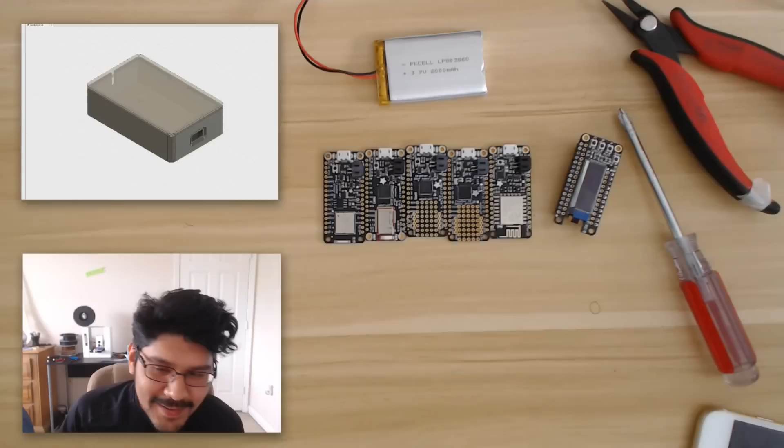Today we're continuing the project from yesterday, a multi-purpose enclosure for the Feather line of boards. I'll link yesterday's stream below where we started this enclosure, inspired by Bill Binko of ATMakers. The main goal is to make an enclosure that works with all the Feather boards, a battery, and a couple of components.

The idea is to have different tops for different situations - one for the OLED FeatherWing so you can see the screen through the top, or tops with mounting holes for components like a buzzer. We had an open discussion yesterday going back and forth on batteries, and ended up going with this battery as opposed to this one.

In today's tutorial I want to walk through the updates I made off camera. I'll likely design this component, the FeatherWing OLED, in Fusion so we can create a proper topper for it with the right clearance and openings for the screen and maybe the buttons.

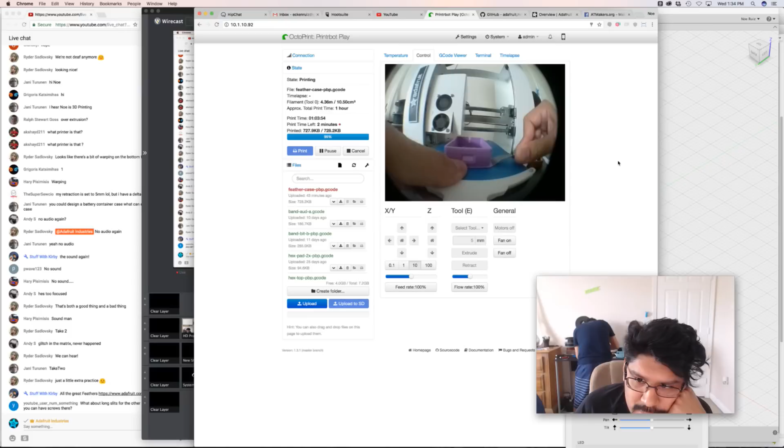This is print number two, just trying to dial in the settings. I got quite a bit of blobs and zits - oh no, you've completely destroyed the bed. That happens, well I guess so. There was some warping - no, I think it's flat.

One way to alleviate warping is to have a big brim, which is what I did here - about 6 perimeters wide. Let me get the focus better. That's a lot more flat. As you can see, the first prototype did warp a little, and there's still some zits and stuff.

We can take a look at the slicer settings, but I'm not sure why that's happening. I checked Simplify 3D's troubleshooting guide, and sources point to maybe needing a restart distance on retraction, or perhaps wipe coasting turned on. We'll work through that, but it's a little excessive here.

Not sure why, but I got the tolerances correct for the nylon screws so they fit in here. Since they're nylon they can't really create threads, so I had to open the holes up a little more. Also, because of the shape of the screw head, they protrude out a bit, which I think is okay.

I tend to use machine screws made of zinc or metal that have a tapered, chamfered bottom edge. These are just flat, so they protrude out a bit, which I don't think is too bad of an issue.

Maybe they can be used as little feet or something. Not too bad, but it fits well. The goal was to have access to the USB port, so you always want a bit of

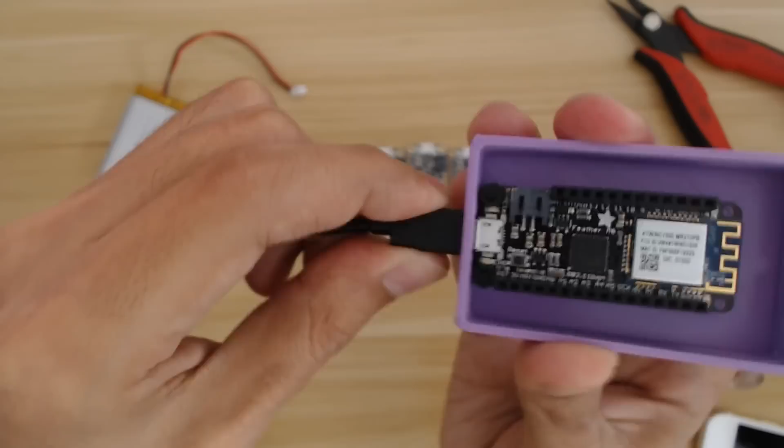clearance for the USB. Where's the USB cable? Where did it go? Oh, that's down there by your feet. If you'll notice, there's a bit of an indentation on the port opening, so it's not just a hole, it's actually a slight offset, so that when you plug it in, the connector has a bit of open area so it can get plugged all the way in.

The enclosure is 3 perimeters thick, so it's got good strength to it. If it was just 2 perimeters thick, it probably wouldn't be as strong. So with that, I can do this kind of indentation here for the USB connector. That seems to work out really well.

I noticed that although it looks like there's a lot of gap here, like clearance, I find it pretty difficult to actually plug this in. So this is the battery, and this is the JST - the male connector, and this is the female connector. There's enough room to get it in there, but you kind of have to finesse it.

I would probably recommend plugging in the battery first and then securing it to the enclosure, because I kind of can't.

Maybe I can work it in there. I know there's enough room, you can kind of see that. I just have to do this little maneuver where it's right angled and then kind of futz with it, but I don't feel like futzing with it right now. Oh wait, there we go.

So there you go. Most likely what we'll have to do is put a hole somewhere here so that this can actually get threaded through the bottom, because we're going to have that external component here. So that's what we'll end up doing. But hey, there's enough room in there. And I ended up making it centered so there's equal distance between here and here, and then this is just extra distance so it can encapsulate the battery.

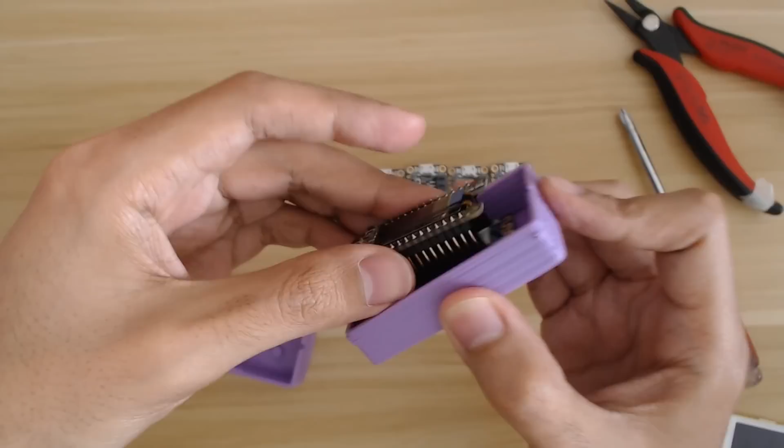We would end up... the goal here is to have one enclosure for all of them. One thing I noted is that it is secured, but if you have something like this plugged in, you have to kind of hold this down, because you get this sort of action here. And actually, when I pulled it off before the show started, I bent these little pins, so I had to flatten them out using a flat pair of pliers, which is okay, but be careful.

So testing that out is always important to make sure you can get things in and out. But that's how it would go. I'll probably have... is it backwards? No, it's the right way. So hopefully that works out okay. It is a little bit thick, yeah, but I think it's okay.

All right, let's take a look at the CAD stuff now. So in Fusion 360, here's kind of what I have set up. I did come up with these - so here's the topper, right? Here's kind of like the generic top. There's a generic top right there, and I made it see-through so you guys can see.

It does have these little nubs, so if I hide the case, you can see these little nubs here. I haven't printed this out yet, so I'm going to get that started soon. But the idea here is that these nubs, or these indentations, will allow the nubs from the enclosure to kind of clamp together.

I also added some chamfers on the sides here on both of the parts so that your fingers can actually get into it. You can see here on these edges there's chamfers, so you have more of an area to open it. I think what's cool is that you can kind of get your finger in here and just lift up to pop this out.

Since I probably don't need these little nubs on all 4 sides, I think that'll work okay. But I might need to get rid of this one, because... make sure that you're on the CAD screen.

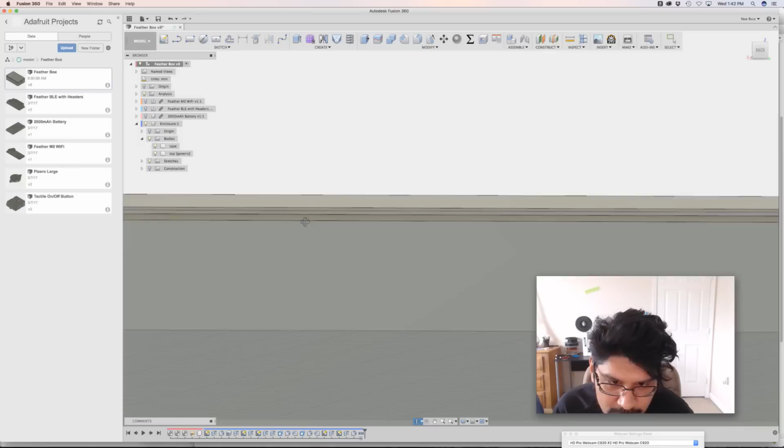And there is that chamfer along the edge of the 2 objects so that your finger can get in there. And if you look on the back here, there's an opening in the slit so that you can get your finger in there and pop the thing off. So no need for a nub there.

And I think I'm going to get rid of the nub on this side, because if you look at the feather component with headers, it's kind of intersecting with that indentation part. So if I open that up, you can kind of see, yeah. So I'm going to probably get rid of this nub here and just leave the side ones. That should be enough to hold it in place, hopefully.

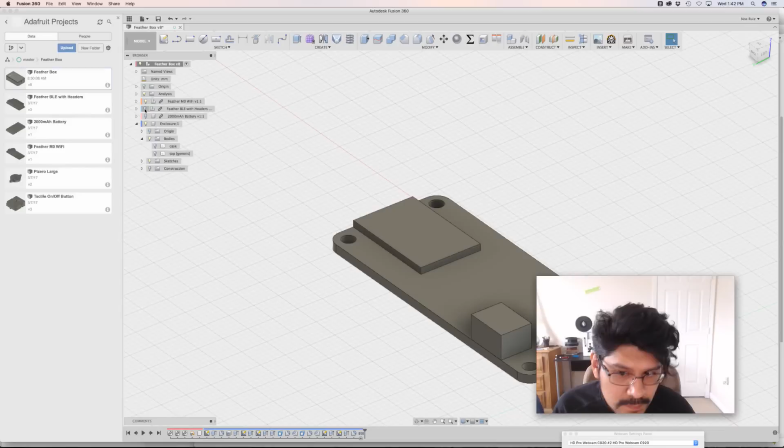I did bring in the feather with headers. Before, when I was designing, I was just designing around the WiFi feather, which doesn't have those headers. So I kind of reworked this one to have those headers.

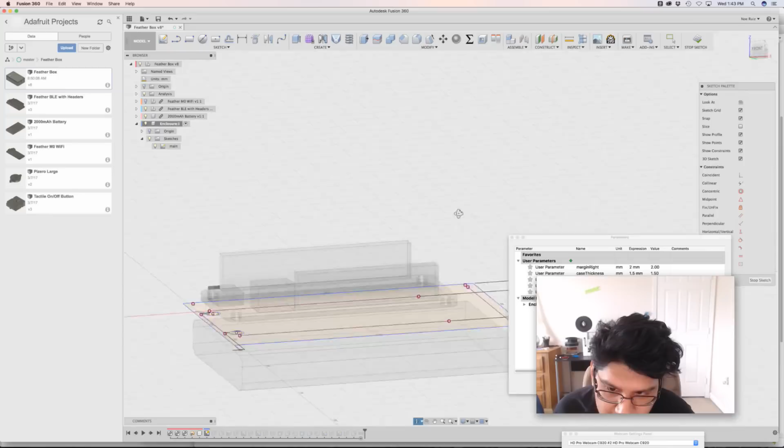Let's take a look at the sketch real quick in the main. I tried to have it centered, because it wasn't really centered, at least on the y-axis. So I got that, and I added a couple of user parameters here, the margin for the right and the sides. This is the right over here, and it's basically being driven through the battery. There are some projected edges here from the battery, so that if I ever need to adjust that, it'll adapt with it.

So if we take a look at the enclosure as a whole, let me get out of the sketch. If we take a look at the enclosure as a whole, we can still modify the width so that these nubs here will actually adapt with it. So if I change the side margins from 8 to 12, you can see the enclosure updated, and those nubs kind of moved along with it. So if we ever have a bigger battery or something, I can quickly push out an update.

So this was what, 8? Let me put that back to 8, and that seems to work okay. So that'll hopefully work okay.

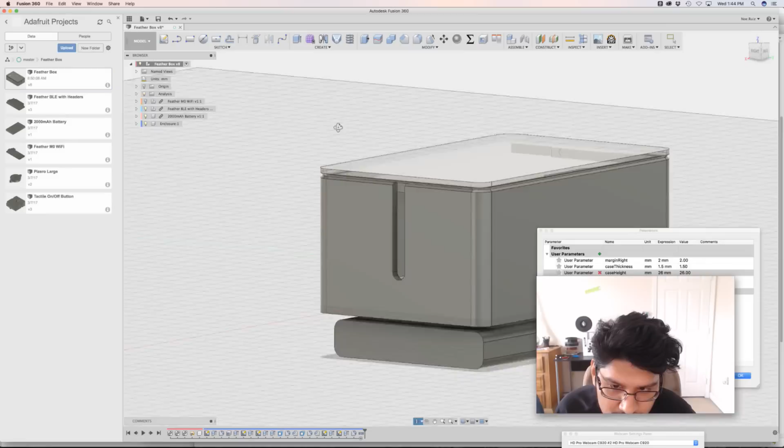The height is still adjustable. So if I update the height from 16 to 26, for example, that's a little excessive, but everything kind of updates with it. Again, those nubs get updated, and the topper gets updated with it as well, and so does the slit, which is driven with a collinear constraint, so that it is okay. So what was this, 16 or so?

Yeah, so it's very important to apply these user parameters before designing, so that you know what features need to adapt with it. So hopefully that works out okay.

But that's kind of it for the enclosure. I really want to get this topper sorted out. So in order to do that, well, this topper will probably work. Let's get this into Fusion 360 real quick, and I'll have it printing in the background. So I'll save it out.

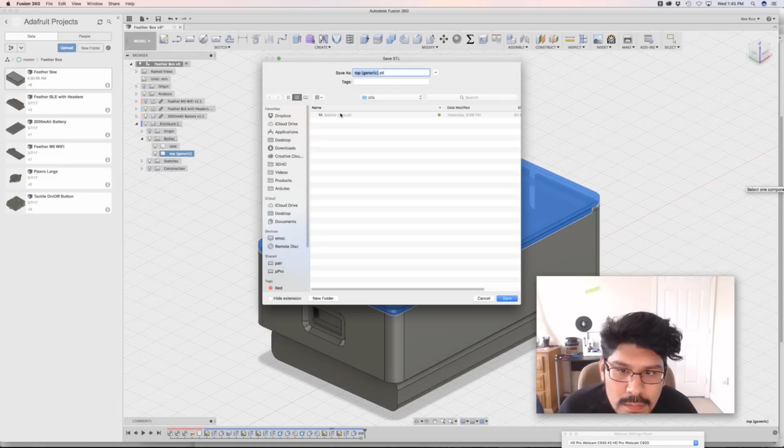And then bring it into Simplify 3D. I'll probably have to flip it so that this side is on the bed. That's Control L too, you can use Control L, yep, like that.

And then we'll do a quick look at the settings. Nothing too fancy here. I'm using the 0.4 nozzle with a 100% multiplier, or 1.0 multiplier if you're using Simplify 3D. The extrusion width is set to auto, which normally comes out to 0.48, and the retraction distance is set to 1 millimeter.

If you're using a Delta bot, it'd probably be something bigger, but I'm using the Printrbot in the background, so it's like 4 to 6, something like that. The retraction speed is set down lower to 20 millimeters a second.

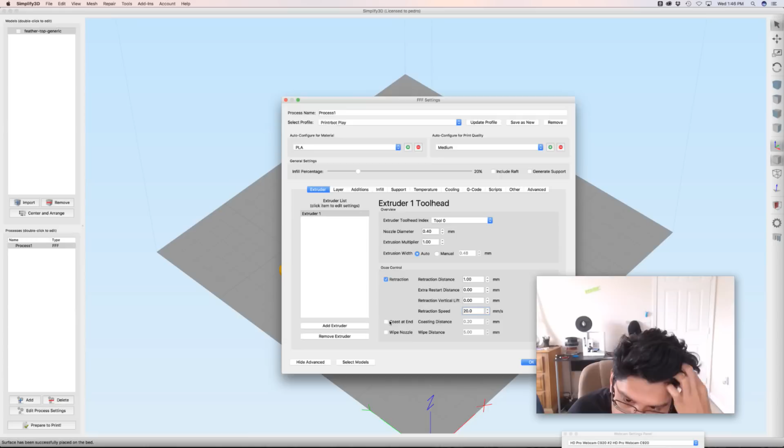Those blobs and zits that you see usually come when the extruder is looping around the perimeter, and to relieve some of the pressure from the nozzle you can enable this setting, but I don't think I need it right now. Still, that might be one thing to consider.

Nothing too crazy here, just using a 0.2 layer height and 2 shells for the outer perimeter at 100%. First layer height is 100, same with the width, and the speed is half that. Speaking of speed, I'm printing kind of slow, 50 millimeters a second on the default printing speed, and 70 millimeters a second on the movement speed. The outline is set to 50, and solid infill is set to 100.

There really isn't much infill since all of these parts are just perimeters. Thin wall behavior is set to use thin perimeters because I don't want any excessive infill gap — I really don't have much there.

As far as the ooze control behavior, it's kind of the same stuff — only wipe the extruder for the outermost perimeters. Maybe I need to turn that off, I'm not sure. And only retract when crossing open spaces, forcing retraction between layers. So if anybody knows if one of these checkboxes will alleviate those zits, let me know.

Pedro's in the chat room, he'll see it if you say anything. But other than that, I think it's okay to print this way with these settings.

So let's take a look at it. Having that big brim with 6 perimeters will keep it down. Let me grab you some more tape — yeah, I forgot, before I can print this I need more tape.

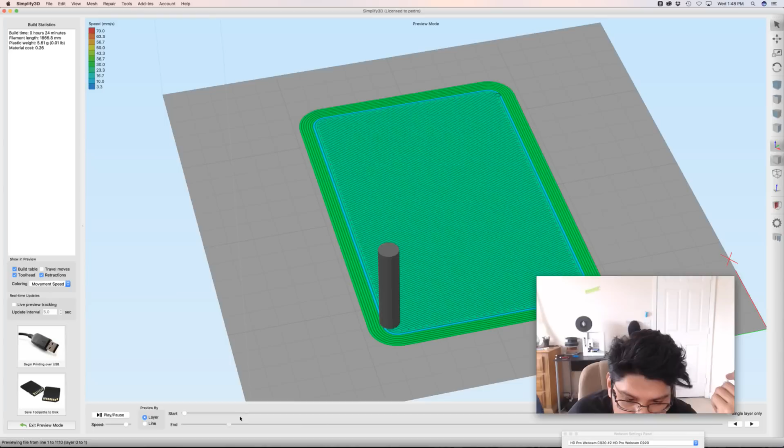It's pretty solid as far as the top and bottom layers, I think I set it to 6, so there's a few of them. There's a tiny bit of chamfer there, so it doesn't really translate too well. The less layer height you have, the more detail you will have, but I don't think I need that much detail, so hopefully it comes out okay.

So we can watch Pedro fix that.

While Pedro's fixing that, I am going to get started on modeling the featherwing component. So there's some — what's that? Some suggestions that have the JST extension, or the battery connect with the JST extension. So maybe making like a panel mount.

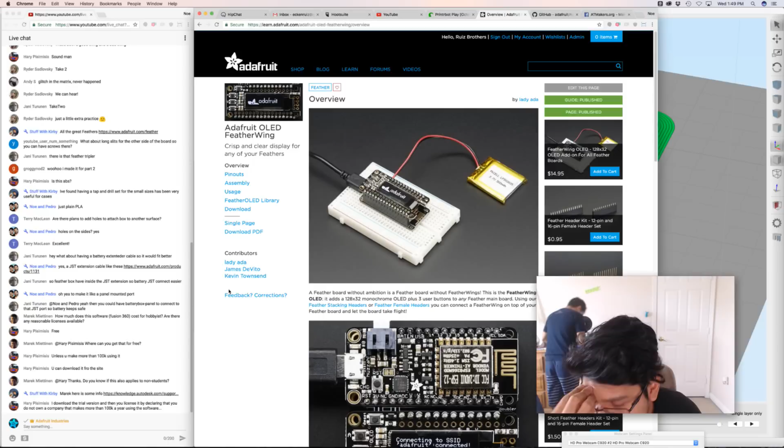Yeah, I don't think it's that much of an issue. I mean, you saw me put it together — it's just the angle my hand was at in order to get it in shot was a little bit hard. I think that was my issue, but there's enough clearance for the thing to connect to. I can see where a JST extender would give you more freedom to plug it in, but I think it's okay. It is an option though.

The featherwing has its own guide like any Adafruit component, and in order to model this, I'm going to raise the bed.

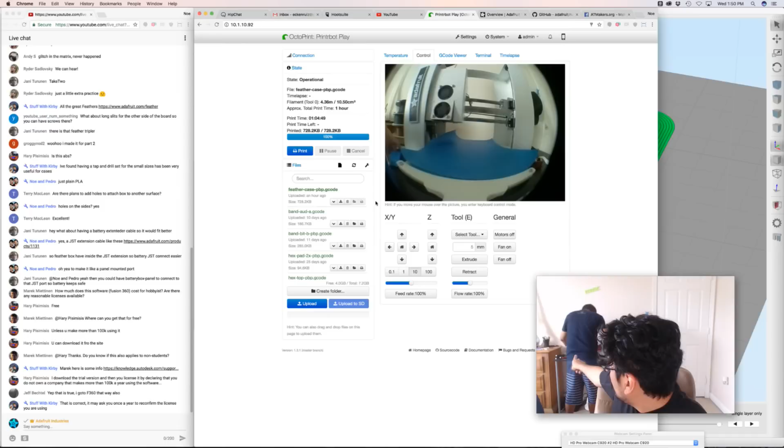Is that good? Should be good. I have the squeegee over there if you need it. There you go. Cool.

So what I did was I went ahead and downloaded the EagleCAD file. You can grab most of the EagleCAD files for all of our components from the guide. If you go to the download section, there's a download for the PCB in EagleCAD. So what I'll do is grab the tech drawings or dimensions for the featherwing.

It looks like they are kind of laid out here. Some of the things, like the buttons, aren't laid out, but at least I have the mounting holes and things like that. So if you click on a picture, you can get a bigger size of it. You can see here.

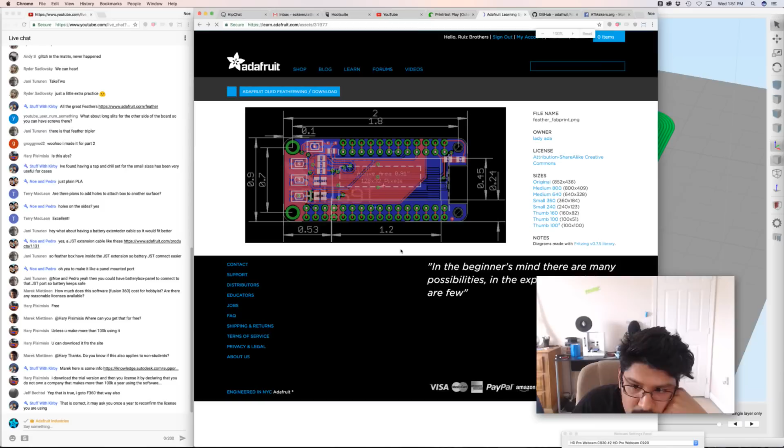But I'm just going to use the dimension tools inside of EagleCAD to get a better idea of the size of the buttons and things, and where they are relative to the board. So let's get printing that topper, just to make sure that our tolerances and stuff work out.

There we go. I'm using Octoprint. Is everything okay there? Yep. Takes a second to upload.

Give me a chance to kind of look at the chat room. Jani's saying that the JST extension, yeah.

Yeah, I talked about it. It would make it easier to connect to the battery. Yep, that is definitely an option. It wouldn't need to do that. You don't need to modify the CAD, right? As long as there's a hole on the bottom of the enclosure, you can do whatever you want with it.

Looks like folks are asking if you can use Fusion 360 for free. Yeah, there's always some confusion with Fusion 360 - is it free? What's this 1-year license deal? The 1-year license is for hobby makers that make less than $100,000 a year, and you can renew it after the license expires. So once my license expires, I will just renew it.

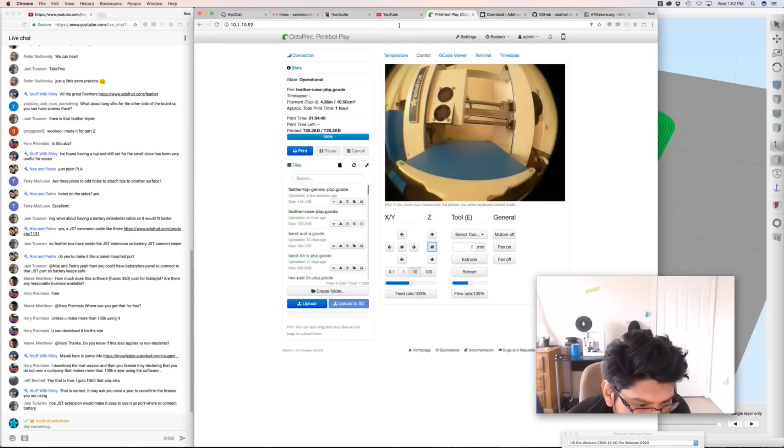All right, stuff is uploaded. I'm going to go ahead and kick off the print. The Marlin firmware on the Printrbot tends to give an 8-second lead once the extruder is nice and primed, and then it'll kick off the start G-code, which kind of does a purge.

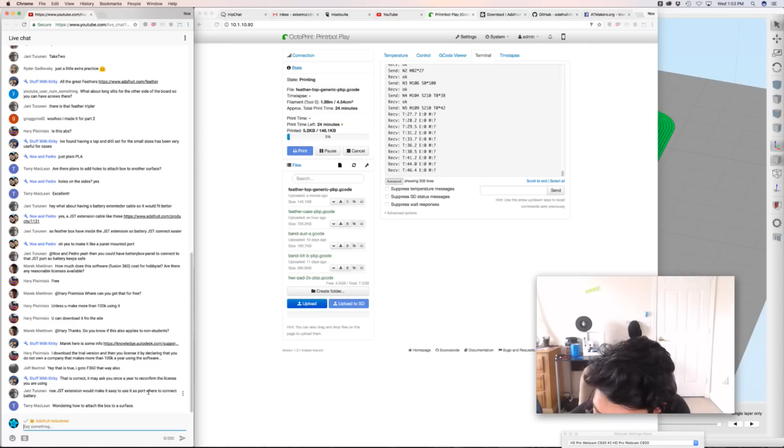Okay, Terry is asking how to attach the box to a surface, like the cover to the lid of the enclosure. There's these little nubs - I'm not sure if that's your question, but there's these little nubs that will connect to it, so they kind of snap into place. And the reason why they're triangles is so that they get fitted in.

So if you look at these little triangles on the edge of the case, on the very top of the case - they're these little triangular nubs, and then those will get pressed into this lip here that has an indentation for those nubs, and there's a little bit of an extrusion on the inside of the case lip.

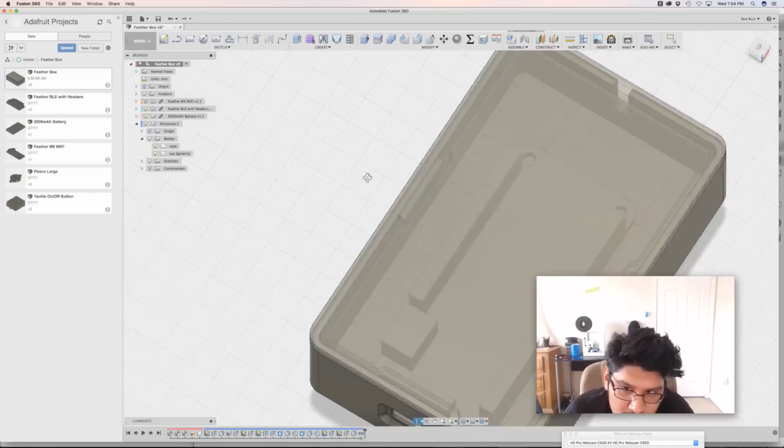So this lip basically acts as a little friction fit thing, so you can see it with the transparency here, how it kind of works. And there's a little bit of clearance along the edge of the lip, so that it allows enough clearance for it to actually snap into place.

But I'll probably end up getting rid of this one here, this front nub, because I think just having 2 on the sides is okay, or 1 on each side is okay. So that's how that's going to work.

Okay. Yeah, it's at 180 right now. It takes a little time - it's not like a Type A machine. It'll heat up in like 10 seconds.

So while that's heating up, once it kicks off, Pedro, can you kind of clean the purge for me? Mm-hmm. Cool, thanks. So I got Eagle open already.

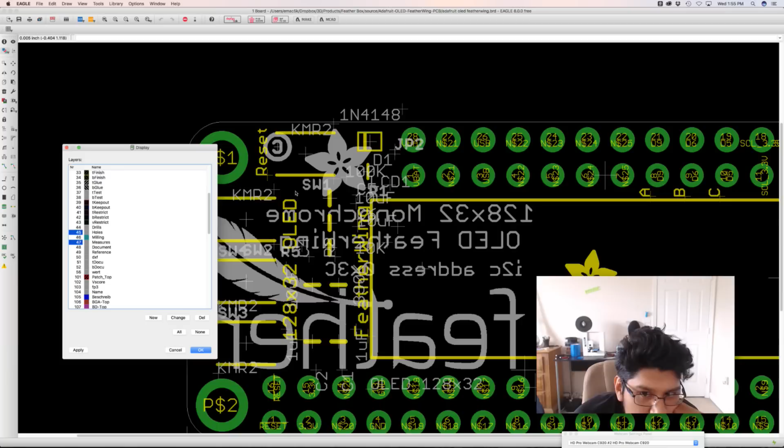So what I'm going to do is just kind of get some dimensions cleaned up in here. So let's see, I probably don't need the vias. And I think there's already a dimension layer. So which layer is this? What's V-score? Well, that's interesting. Holes is there, I think it's under measures. Nope, document. Dimensions is on, but I don't see them.

Mitchell is asking how we can weatherproof the box. Epoxy maybe, like XTC 3D? Yeah, but I would just probably make little Ninja Flex kind of plugs so that you can close all of the holes.

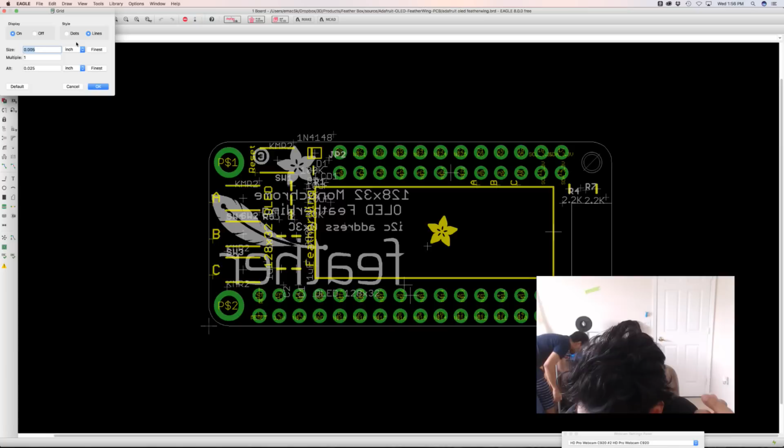If your enclosure doesn't have any holes, then I guess you're safe, as long as you have a nice weather-tight thing. But I haven't really made anything weather-tight. I think one way to do it is to make these rubber Ninja Flex covers that would fit into the little port openings.

Let me take a quick look. How's the first layer doing? Good, okay cool. Alright, that should take 24 minutes or so.

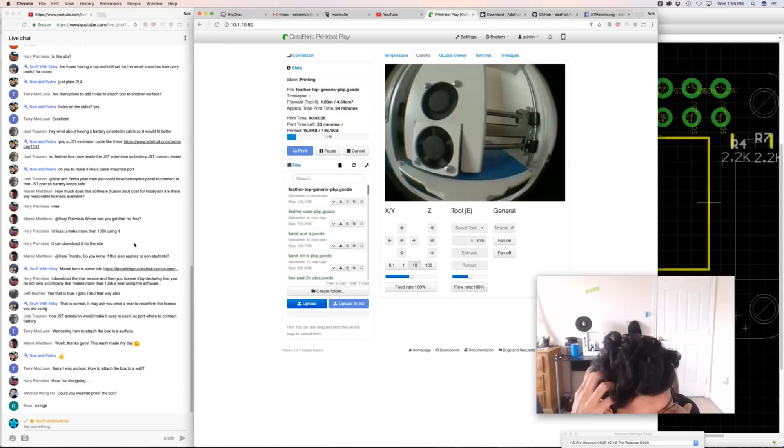Hopefully less. Russ is saying O-rings, I'm guessing, for the parts where the lid snaps onto the case, so that it gives a watertight seal to all the openings. Yeah, that's a good idea.

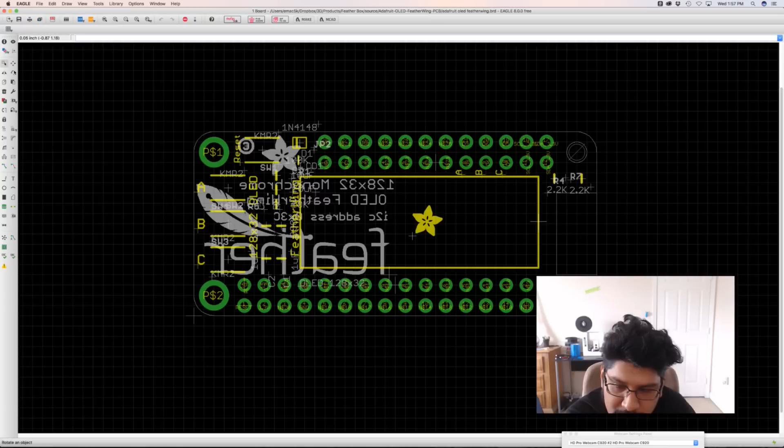Another thing you can do is maybe spray Never Wet onto the boards themselves. This is a weatherproof coating for electronics called Never Wet. I think Becky was testing it out, showing an Arduino working underwater, and as long as you don't have the battery in the water, I think you're okay. I don't know too much about the coating myself, I haven't used it, but look back if you're interested, search for Never Wet in Google, and maybe our video, Becky's video, will show up.

You might be able to heat shrink the entire circuit as well, just stick it in, because she did that too. Just put the whole bare board inside and heat shrink it. But of course you might not have access to it after that, you'll have to cut it open. Let's just get a tauntaun, cut them open, throw the board in there, and you're good to go.

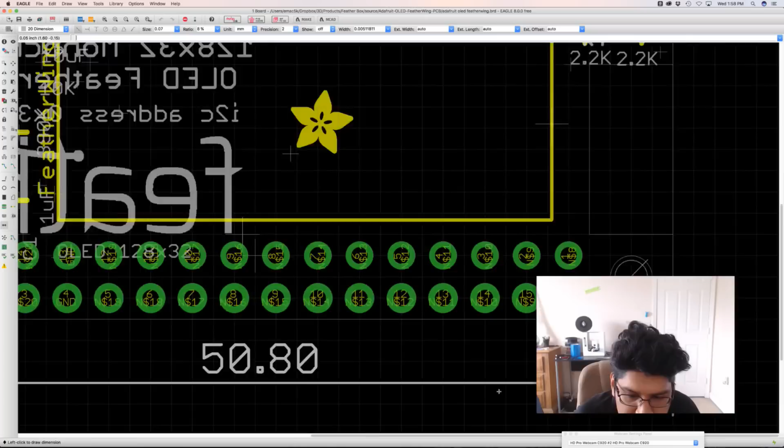There's a dimension tool inside of EagleCAD, and I'm going to use that to get these dimensions. I need to make sure to do it on layer 20. The board should be about 50.8 millimeters on the X, and on the Y I believe it's... I forget what it is, and that's why I'm doing it this way.

22.86. Okay, the footprint for the buttons looks like it's not there, but that's just Eagle—maybe I hid the layer. I want to get rid of this silk screen layer, I think it's that one. I'm gonna get rid of all that.

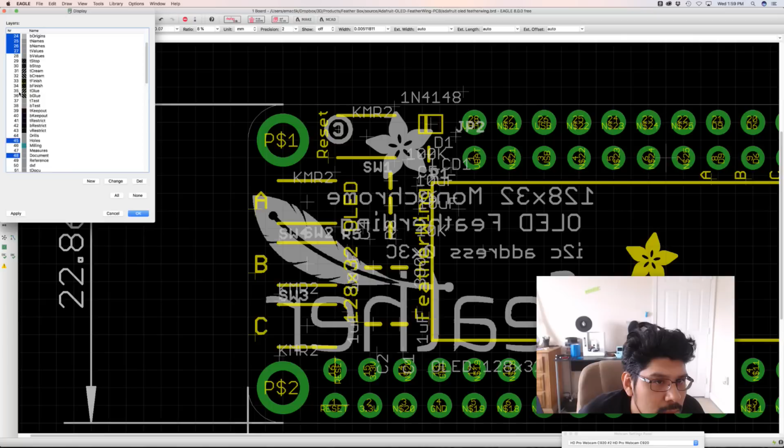Maybe it's T place. T place, yeah that's the one. I kind of need those. So I'm guessing these guys are the buttons, right? Yeah, these are definitely the buttons. There's 3 buttons, A, B, and C, and then there's a reset button.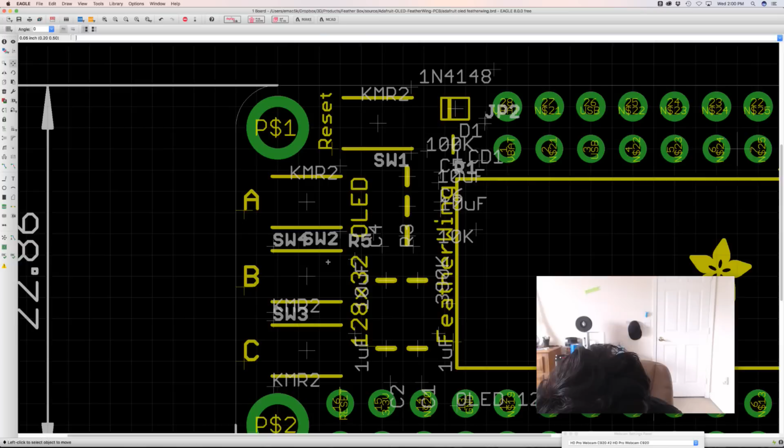So I plan to model definitely the PCB board, obviously, and then the OLED display itself, which is in a very special spot, and then the 4 buttons.

Let's see, I think the mounting holes are... what's the distance between them? 17.78 for those.

And then the screen looks like it's in an odd place. No, that's just a little Adafruit logo. Okay, where's the... there's the screen, right? That's gonna be tricky.

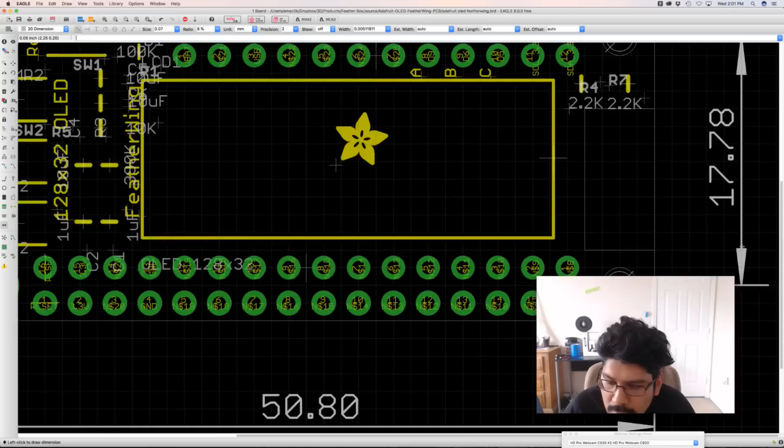And then these guys in the back, where is it? Looks like it's the same. Yep, so the mounting holes from the left and right look like they're about the same. That's good.

There's this kind of cutout, which is kind of interesting. So there's the cutout, and then I'm not sure how wide it is. So that's how wide it is, 5.08. So I think that's enough to figure this out.

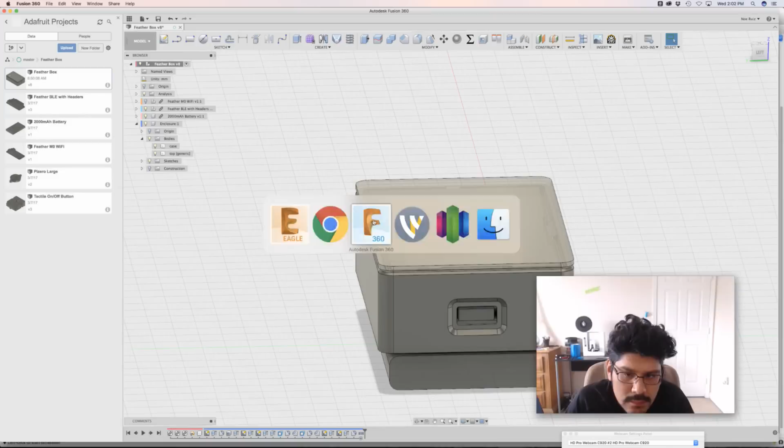So in Fusion, I'll get a new component here, a Feather OLED wing. And one thing I didn't know is that the document—yeah, it's there, okay—so this is like the origin of the document, so it's sort of 0, 0 from an X and Y standpoint, and everything kind of gets pushed out that way.

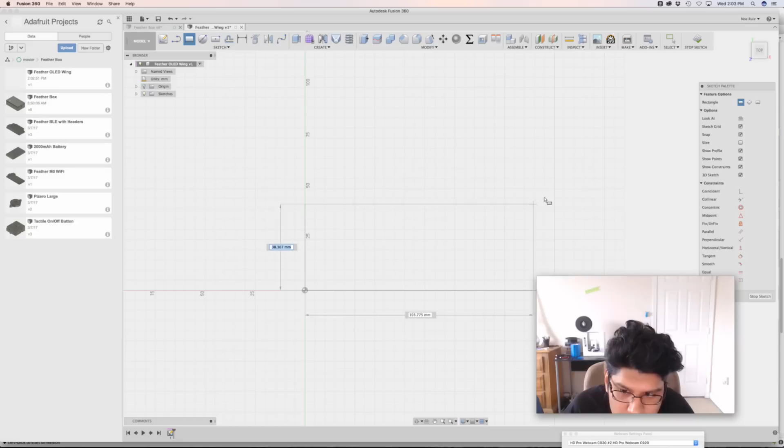So I'll kind of make it the same. Oops, wrong, don't want to use the center rectangle. 22.86 by 50.80. Yep. 22.86, that's correct. So there's our main board.

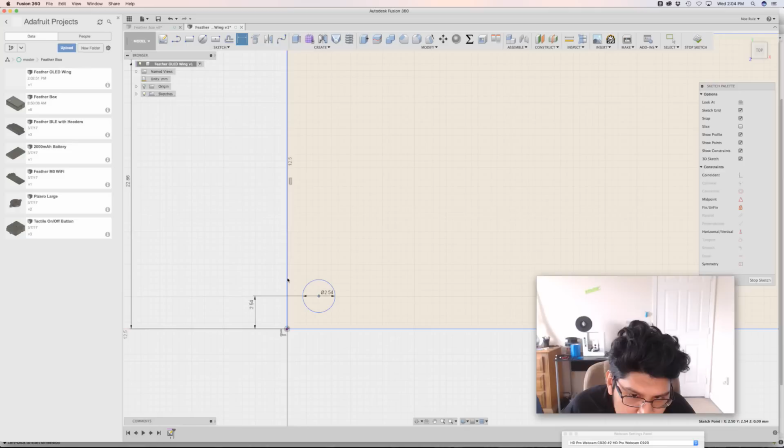The mounting holes are, I believe, 2.54, and they're using the same distance from the edge of the board. Then I'll do a little mirror action here, so I can mirror this guy on that line, and then maybe run it again.

Well, I need a center thing. Oops, use the line tool. I'm using the line tool for making these construction lines, and then using the X key to do that normal construction thing. So I'll do another mirror here, mirror these two guys on that vertical line, like that.

Hopefully that is correct. I think if I do a quick measurement, it should be 2.54. Yep, should be fine. So that's the main PCB. The thickness of the board is 1.6 millimeters, and then there's a little fillet on the edges here.

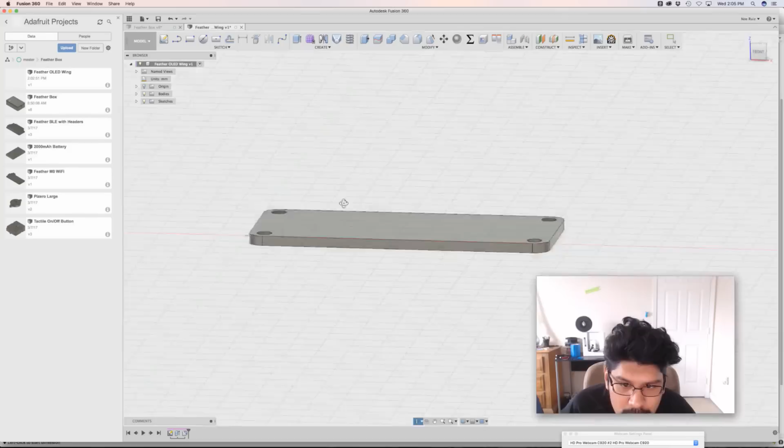Of 2.54 also, so there's our PCB. Actually, I forgot to do the cut, so let's go back and do that cut for the ribbon cable, the flex cable for the actual OLED. So it's somewhere over here. Let's do collinear, so it's on the edge of the board. It was 5.08, and then it is 10.16 wide.

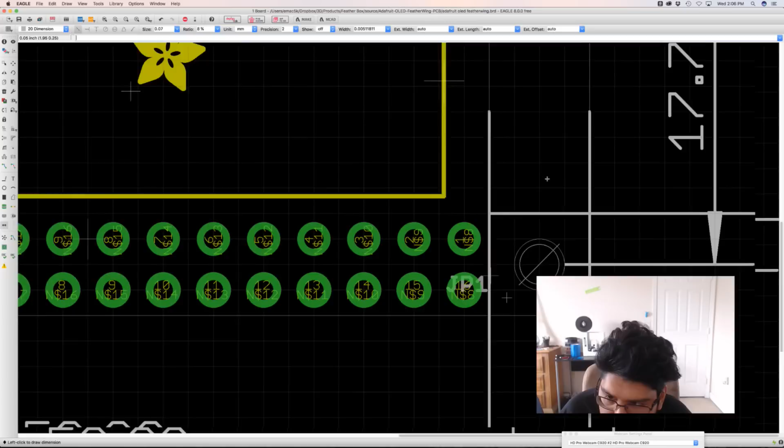Okay, so I got those in there. Now I need to figure out the distance from this guy. Dude, it's kind of tough. 5.08. Just off by 0.8. It looks kind of odd, doesn't it?

Oh, that's the way it is. See, the cutout isn't actually centered because there's some resistors here, that's why. So it's not really centered. So let's okay that and jump into that extrusion and just get rid of that. It is pretty sharp, there aren't any fillets on that edge, so there we go. That's what we got so far.

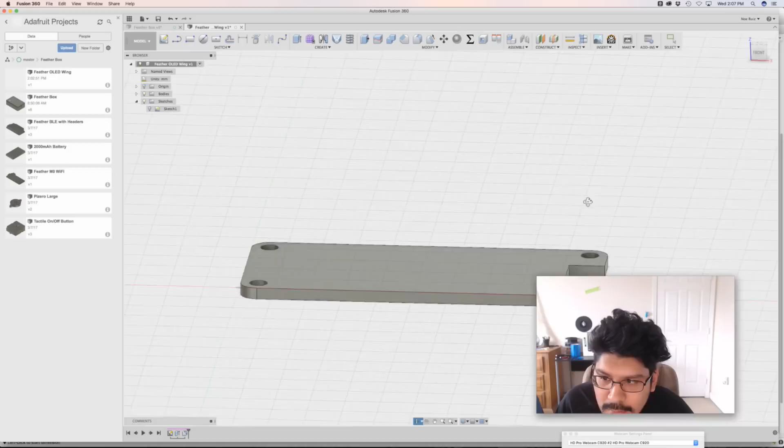How's the chat doing? Good. Just chatting with them. Let's see.

Harry's saying maybe I need to start printing at lower speeds as well. Yeah, I think the default speed for the Printrbot Cura profile is like 50. Yeah, I tried printing it at 60 millimeters a second, or 70, and it came out really bad. Like, this thing came out awful. I just want to show you how awful it came out. Look at that, it came out so bad. I don't know why, I guess because it was too fast, so I slowed it down. Look at that, like what is the deal there, man? That's crazy.

Yeah, so on almost all the printers we're usually at 50 to 60 millimeters a second, but on the Type A machines and the Flash Forge, we can go up to 90 millimeters a second. Yeah, it really depends on your printer. Cool.

And I think the TAZ default is 120 millimeters a second. If I remember... the default speed? I think so, or is it 100 millimeters a second? I don't know, Kirby could tell us. I vaguely remember it was at 100 millimeters a second for their default speed.

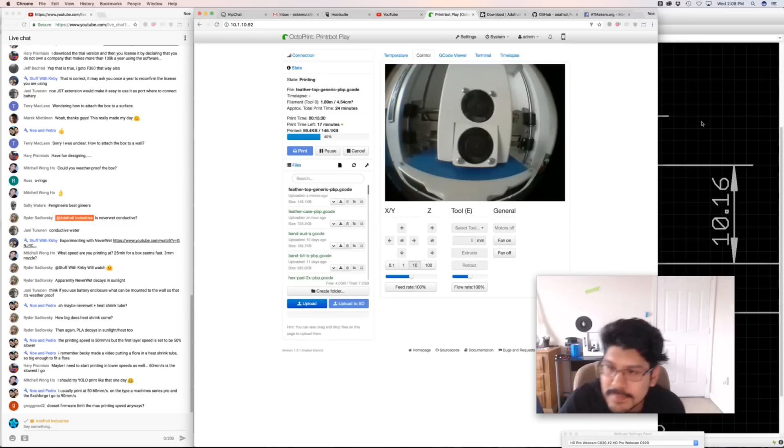Oh, that's a good point. Grog in the chat room is saying he thinks the firmware limits the max printing speed anyways, so even if you tell your slicer, the firmware will be like nope. Also, things that slow it down are whatever speeds you have set in Simplify 3D for outer shells. Yeah, your outer speed is always like 50 or 80% of whatever the default is. Harry's saying he uses 80 on his MK2. I'm assuming that's the Prusa. Yeah, Prusa MK2. Okay.

Alright, so how big is this LCD screen? Let's get that kicked off here. So this is the... I'm going to project that there.

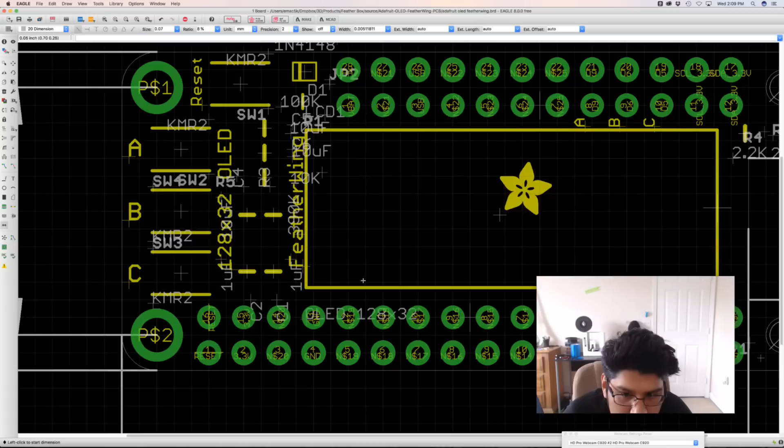It's a little tricky. Yeah, I need a finer pitch grid. So that's a really fine pitch there. I'll start from there.

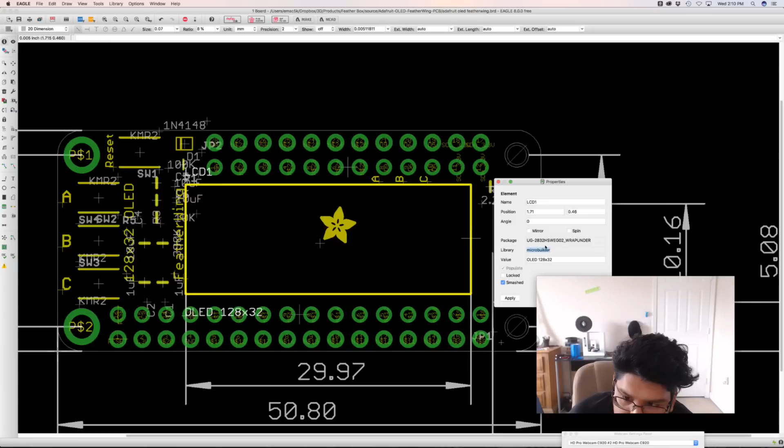I could try using the info inspect tool to see what the actual thing is, but it doesn't really give you a thing. See, it tells you the position relative to the origin, but that's not going to help me here. And the package is a set of the microbuilder library, which I don't have access to, so I can't go inside and edit the main library component from Eagle. It's just kind of baked in there. So this is kind of a hacky way to do it, is to figure out, just use your dimension tool. So it's 29.97.

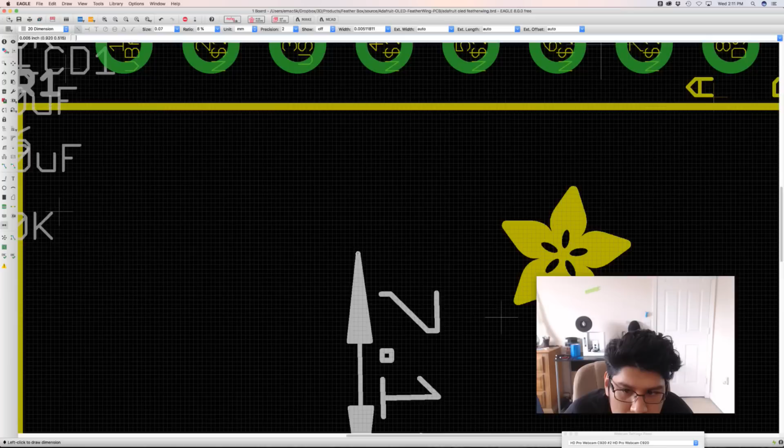And then we'll see what the width is. So it looks like 11.3. And then we'll see how far it is from the edge of the bottom. Looks like it's at a curve there. It's at an angle, it's kind of weird.

There you go, it's better. 5.97. Well, that is tiny. Oh no, no, no, sorry, that was the wrong thing. Yep, okay, and then we'll find out from this edge. Hopefully that's not too much of a hassle.

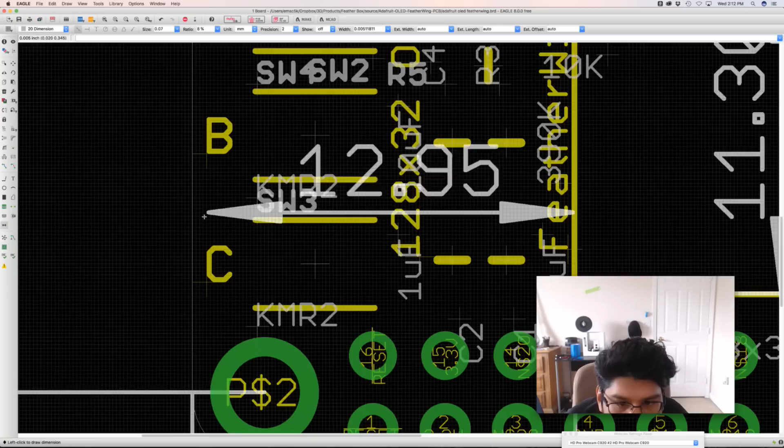Looks like it's going to be 12.95.

Does Wirecast enable on-screen keyboard presses? I don't think it does. That would be cool, huh, so you can see what key commands I'm doing. I know ScreenFlow does that, but it's not the same software, it's a little bit different.

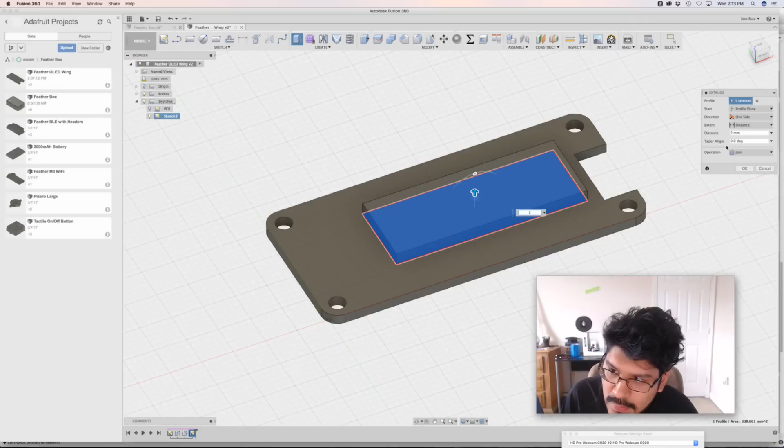I usually talk through it, but I'm kind of in the thick of it. So what I'm gonna do next is, sure, I get the X and the Y for the OLED screen, but I don't know the thickness of the screen, so I'm gonna have to use my calipers to do so. Here's an opportunity to do this, how do you find out, right? The bottom of the caliper has this little nub here, and you can determine the thickness of something by having this on one thing and this on the other. So let's see if I can get this in the right shot.

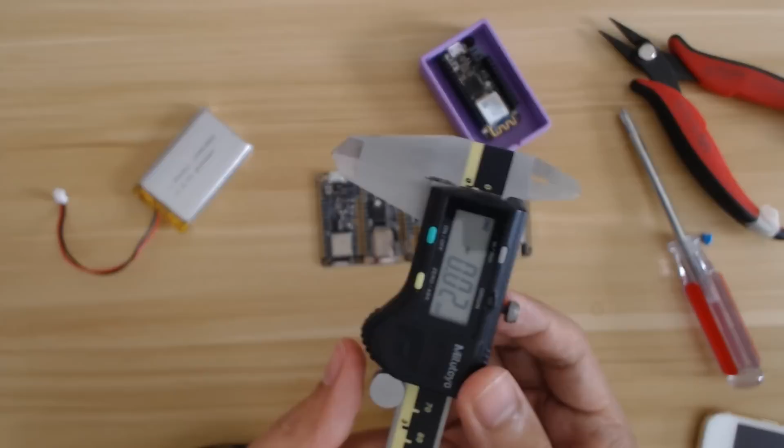First of all, make sure it's zeroed out correctly, because it's not. So I'll zero it out. Okay. It's probably like 1.6... 1.62.

Right, we're saying that maybe there's a plugin for enabling key presses. I haven't looked into plugins for Wirecast, I don't know if they have an API or let folks do that. It's definitely worth looking into. Alright, so I got my OLED.

The next thing. Yep, Harry's asking about the AstroPi tutorial you did. He's noticed that you have the UI on the screen, he's just wondering how you did that.

I'm using a plugin. Wait, oh, AstroPi, yeah, that's just a browser using Chromium, so what you can do is have this kiosk mode inside of Chromium, which is the browser software for the Raspberry Pi. And I believe I put in the tutorial how to set that up and configure it so it opens up only in Chromium full screen, so none of the extra bits and bobs are all over the screen. So it's kind of a hack, but if you want it in that kiosk mode, just search for Chromium Raspberry Pi kiosk mode, and our tutorial should show up, or one of the tutorials on the learning system.

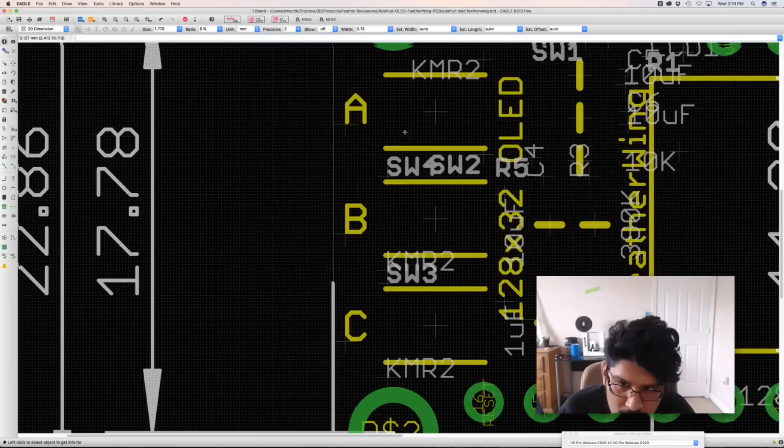So that's all. I could probably use a pattern thing, but I don't know what the distance between them is. I could figure that out, but maybe it's okay. I think this way is more. Did I get that right? There we go.

Okay, how thick are the buttons? I think they are... let me see here. Oh, it's so difficult to get this because of the way the placement of these buttons are. It's really hard to get a flat surface on the PCB, so I might not have it exactly exact. From what I see though, it's probably like 1.3.

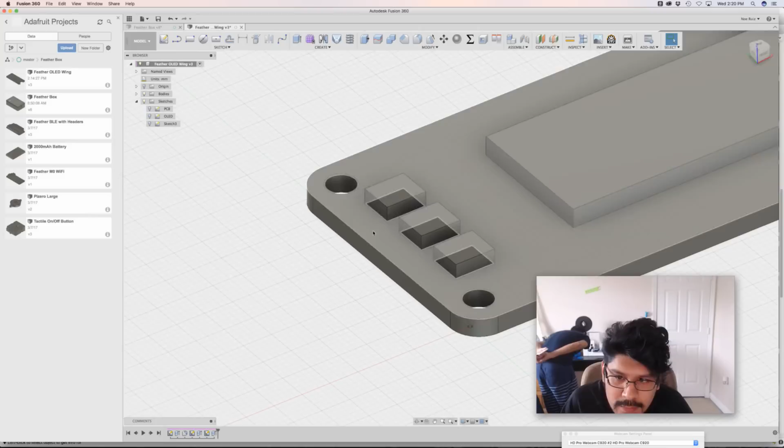And then I need these little rounded buttons here, so it's kind of like... I don't know what the radius is of them. Is that 1.7? Yeah. Oh, come on. There's no blobs on this one.

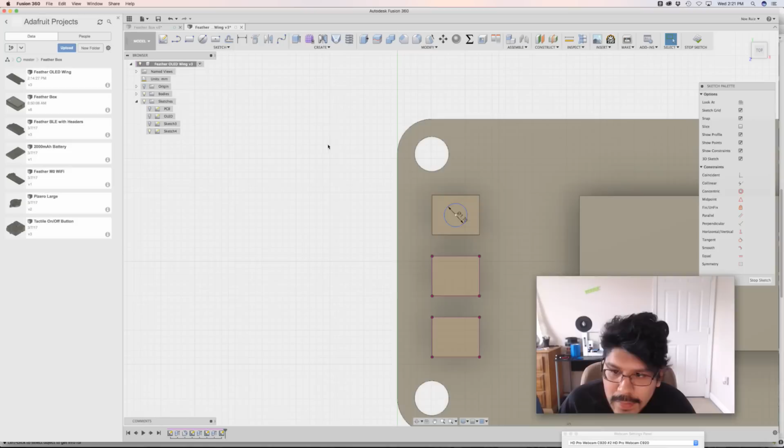Alright, so let's take a look at the part here. Can you all see that? Yeah, nice and flat, definitely the brim. I usually don't use a thick brim like this, but hey, it's working out okay here. You can just kind of break them with your hand, or cut them, whatever.

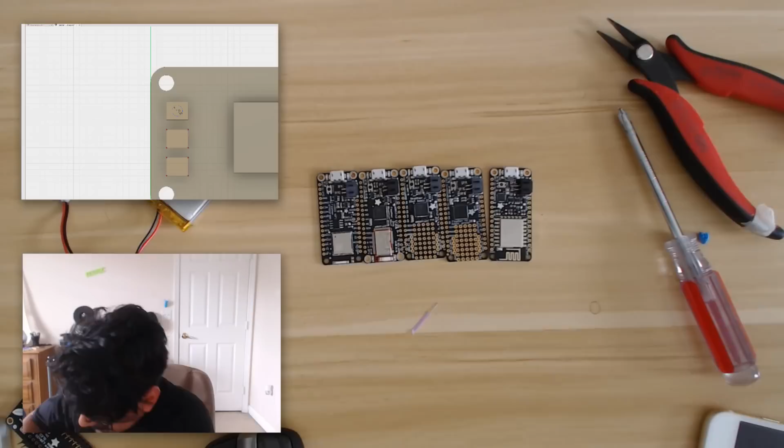So it's supposed to be like this. Ooh, how is it? Tight fit. I can't seem to... I might need a bigger offset. The offset right now is 0.2 of a millimeter, so I might bring that up. But it could be... oh wait, this is the wrong enclosure. It's this one, this is the right enclosure, because I cut it out because it was kind of failing.

Let's see here. Phew. I feel like if I press it in, I'll never get it out again. If that was okay... yeah, it's not working. So this is where a user parameter would come in handy so that I could change the offset, but I don't think I designed it that way, so I'll have to manually insert that offset.

Yeah, the smaller your enclosure, the more clearance you need I think. You definitely don't need that nub here, so I'm going to get rid of that. Because if I didn't have to worry about it, then... yeah, there's just too many points of friction in order to get these two pieces to sandwich together. So that's what I'll do. Over-engineered, huh?

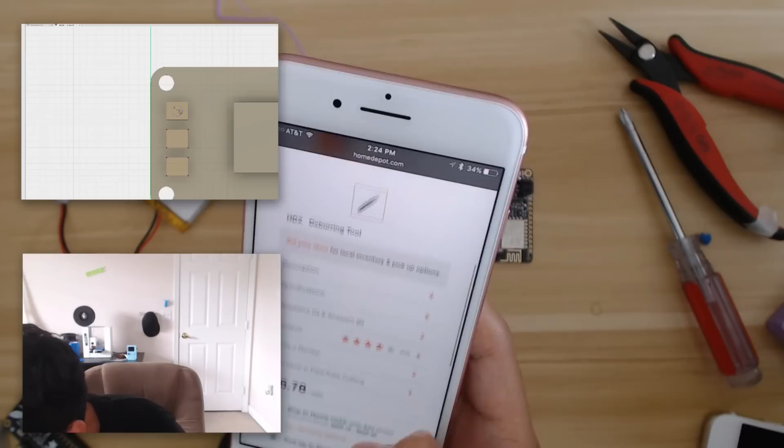Kirby's saying that we should get a deburring tool to clean up the brim. A deburring tool, like a Dremel? It looks like... is this a heated element? Oh, that's cool, so it's like a little metallic sort of... this is a deburring tool, HDX deburring tool from Home Depot. Usually I'm able to get the brims off with an X-Acto knife, but it'd be nice to have a tool to do it. So it melts the plastic? Just spin to get it off? Yeah, it's meant for metal and plastic. It's like the plumbing tool. That's pretty neat, I haven't really heard about it. I'll check it out. Thank you for that comment.

Also, what you got? We have a new version - this just in, breaking news - the Adafruit Bluefruit LE Connect app for iOS has been updated. What's the new update? Check the notes - fixes wrong data on the control module. Okay, check it out, cool. Is that K-Town or Colin? Either Colin, K-Town, or Antonio? No, Antonio. Yeah, I think Antonio does one of those - the Android app.

Have to make sure to remember to go back here. Alright. So it's not heated, just a sharp edge. Oh, gotcha. And it chamfers it slightly. Yeah.

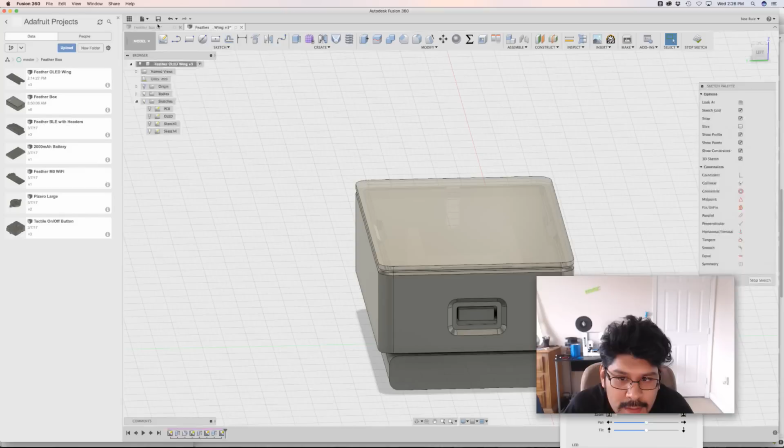Mitchell is saying, isn't it shrinkage? Maybe it's shrinkage, and that's why it's important to have that extra clearance to allow for those tolerances to be a little bit loose and not so tight, because you do get a little bit of shrinkage. The shrinkage I usually see it at either 0.4 or 0.6. You do? Yeah, well I guess I didn't have enough because I have it at 0.2. So if we go back to the feather box, I have an analysis thing, so I kind of step through it. You can see it's not a lot at all.

Yeah, so the first thing I want to do though is get rid of that, this guy here, this nub - I really don't need it right here on the front. So what I did, Pedro showed me this, I didn't know you can do this - you can create, you see this right here? This is a group. If I expand that, you can see all the things that are in that group, and you can name the group. So I named it 'top' - all the stuff that have to do with the top are in that group. It's one way to clean up and manage your timeline. If you don't know how to do it, you just select multiple things, right click on it, and say create group. But then you're not able to ungroup it, or did they fix that?

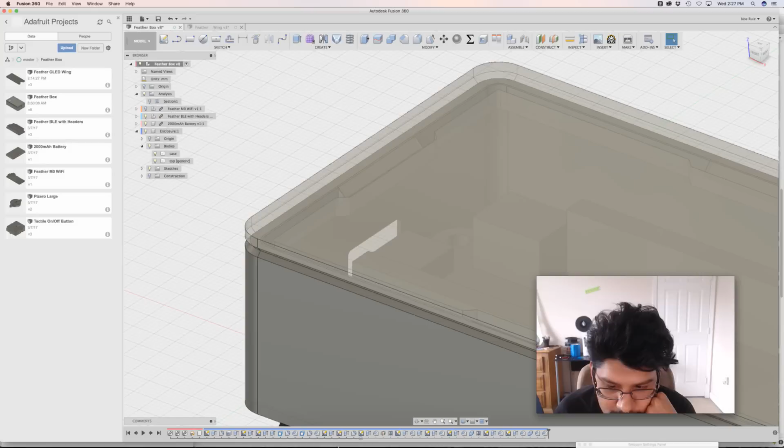Or was it that you couldn't add, remove, expand group? And then I wanted to add things to a group, just drag and drop it in there. I don't think it allows you to do that. So I have like two groups that should have been one group.

So I'm going to grab this whole chunk here and just delete it. And then this one as well. I don't need that sketch.

So the top is okay. The top has been cleaned up as far as the nub or the indentation goes, but the case still has that nub. So if you click on a surface, Fusion does a good job of figuring out where that is in the timeline. So I'm guessing it's these guys here.

And of course you get a deletion warning like, hey, some features are referencing other features. But from the looks of it, it looks okay. There's no yellow warnings or red warnings, so that's okay. So let's bring back the case, and yep. Okay.

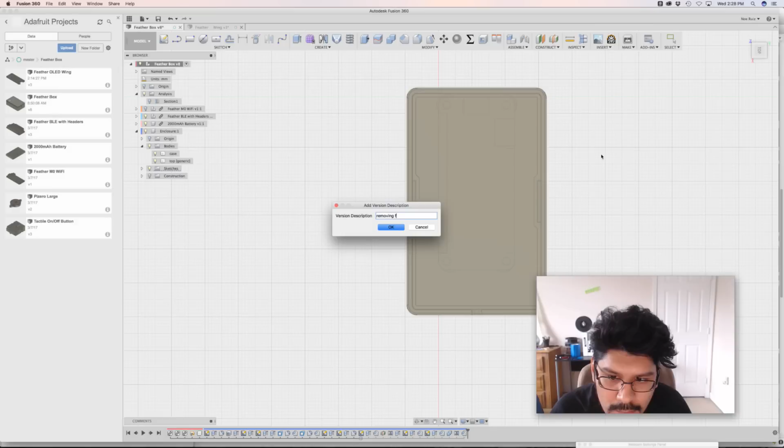Cool. Now to create that offset, I believe I have to go in here. No. Where does it start? Here?

Let's just open up our sketches. Here it is, top.

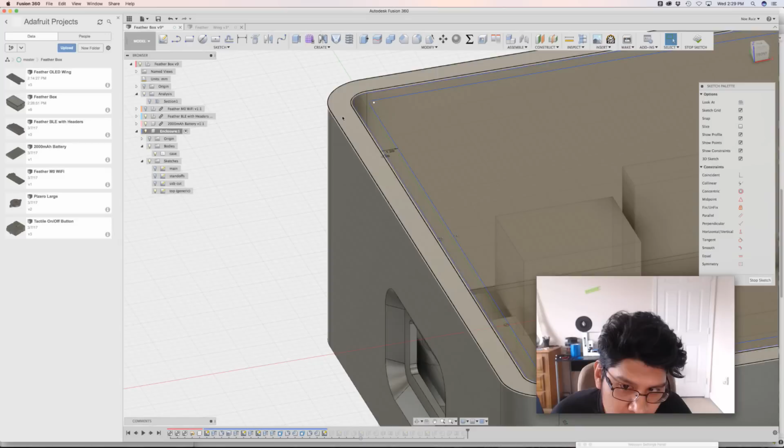Yo, there we go. So you can see here there's a little bit, here's how I built it, right? Just projected the top of the edge of the enclosure, and I did that so that if I ever update the height of the enclosure, this guy will go with it, because I am referencing this surface here. So that's why I projected it and created a new surface here. So top sketch is being derived from just this top solid here.

So let's kind of make this thicker. So I'll put 0.4, and then this one will be 0.4. So now I have that little bit of clearance. So hopefully if I hit stop sketch, things will just update. Hopefully.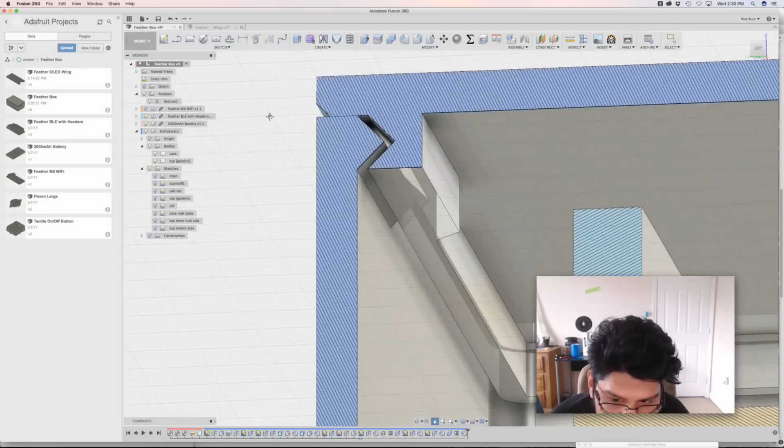Yep, not too bad. So now if we do a section analysis here, we can see through it, kind of cut through there, and you see that there's now a bigger gap. If we look underneath it, we can see and do like a quick measurement. So I'll hold down the shift key, click on that edge, and then click on the surface, and then yep, the minimum distance here on the far lower right hand says 0.4, so we're good. So hopefully that is the proper clearance now.

And if you're curious, the thickness of the kind of lip on the top here is just 1 millimeter thick. We could make it thicker, but I think two perimeters is okay. So you can see that here. Minimum distance is 1 millimeter. So let's try that. Let's get this printed next.

Let me export this as a STL. That wasn't too bad. I thought it'd be a little bit worse. Not bad.

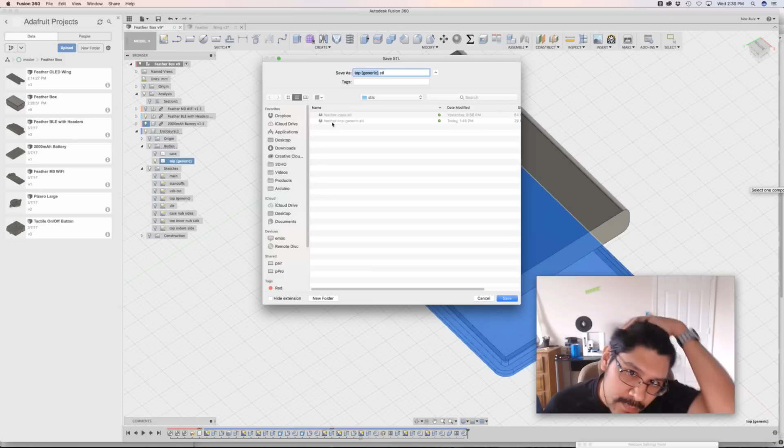Just giving a little note there when I do my saves over here.

How's the thing? Is it? Yep, we're good. Command L.

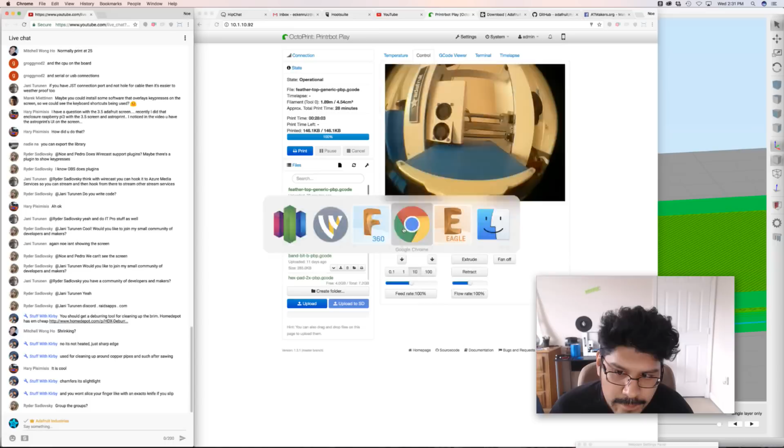Oops. You can see here it's just 2 perimeters thick, and I believe 2 millimeters tall. Let's just overwrite it.

So you are way past, not way past, but it's like an hour and 5 minutes so far. Oh, cool. Well, this is probably as far as I'm gonna get. I mean, we could keep going, I guess. I did want to finish up the featherwing, the OLED featherwing. So I'm kind of in the midst of getting these 3 buttons modeled.

Oh man, it still doesn't want to. Wait, there it goes. Whee!

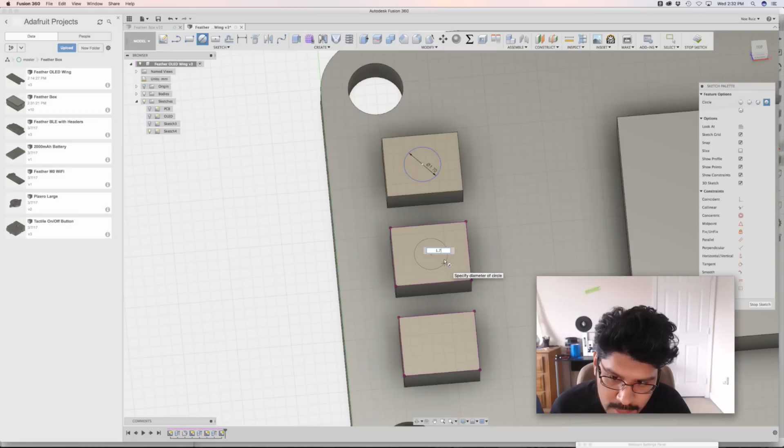No, these aren't rafts. We use brims most of the times. Yeah, no rafts, it's just a brim. Raft would go on the bottom of the part.

They're so small, these little buttons. So I got those. I guess the only thing I'm missing is the reset button. They're all the same button component, so.

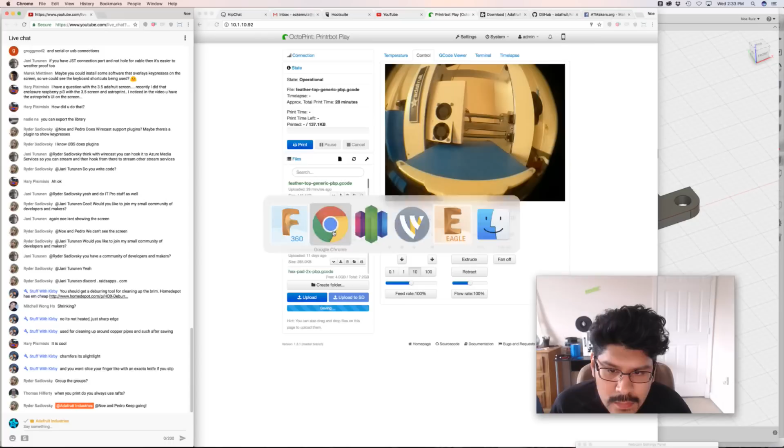Did you start a print on the Sigma? No. I'm still uploading to Octoprint. Yeah, right, just keep going. Okay, I mean, this is what I do all day, so.

It probably makes sense from a live stream standpoint, but I don't know how this will work for the folks watching, going, hey, I came here for a tutorial and I got a long live stream.

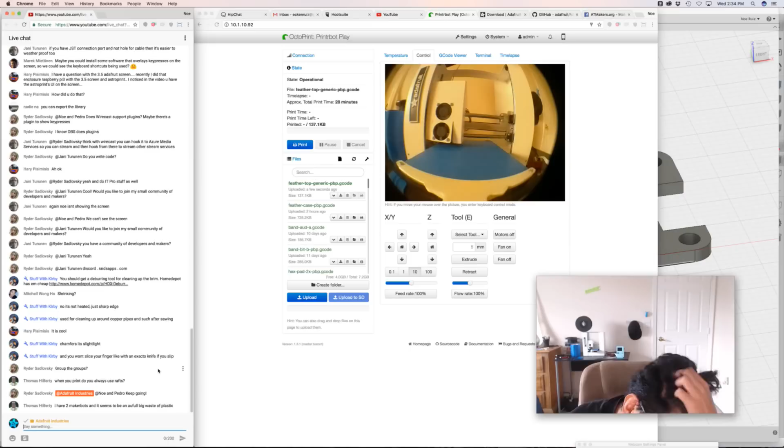Thomas has 2 MakerBots and it seems like an awful big waste of plastic - you're using a raft on the MakerBots. If you have really good leveling, you don't need a raft. It is a big waste of plastic, that's why I don't do rafts. I do, however, use rafts for things that don't have a flat bottom.

Alright, we're uploaded. Yay. Here we go. Alright, that's going to cook up, and then I'll start printing.

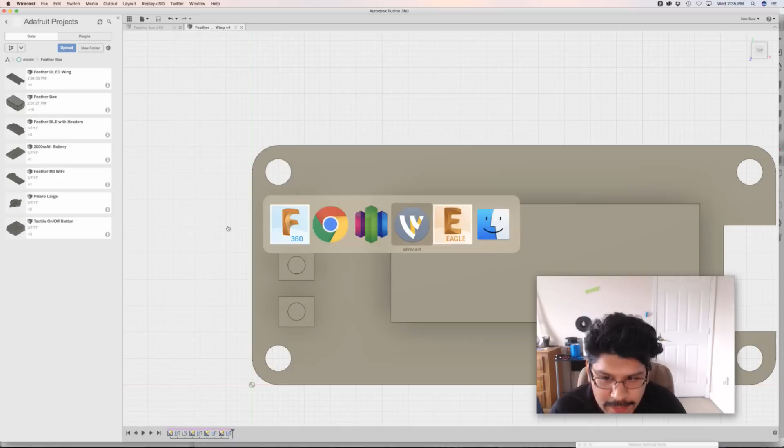I guess the last thing I'm going to do is make that button. Modeling the pins, I don't know if that's necessary. I probably should make these bottom things - I'm debating in my head whether or not I want to make these guys here, the pins. I probably want this plastic piece modeled and correctly positioned so that when I put the 2 components together in Fusion, I know the correct distance from the bottom of this PCB to the top of the female headers.

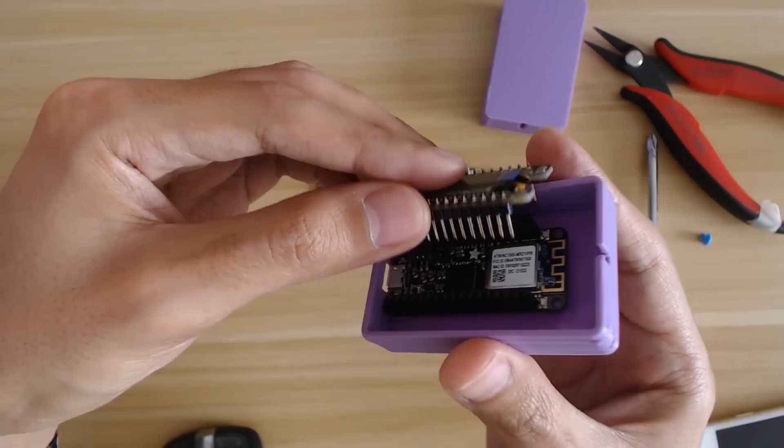I think I've done that once or twice before, but other than that, that's all I'm going to make. I've got these 3 buttons, the display, the PCB, these little cutouts, and I'll get that reset button. I'm not sure if the cover should have 3D printed buttons - it probably would be good because they're a little bit difficult to actuate, but I'm not sure.

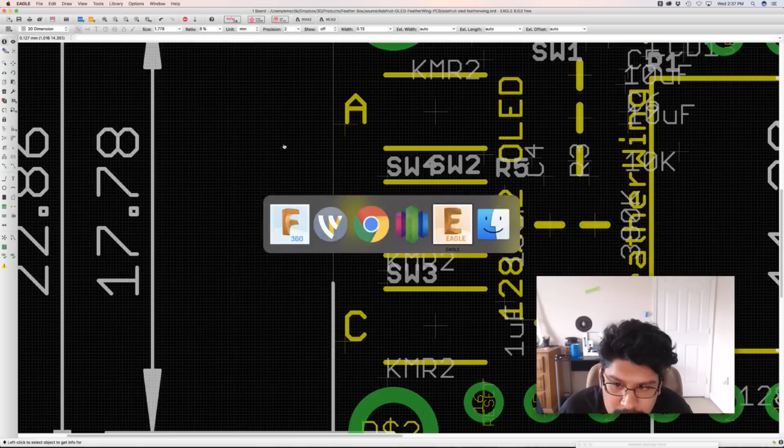So just naming those, and then the restart button somewhere up here - it's definitely the same size as the other ones. So I just need to get some sort of dimension set. Maybe here's better, let's find out what they really are. Oh right, I can't really do it that way, I have to do it from here to this edge. Just kind of rounding them off for now.

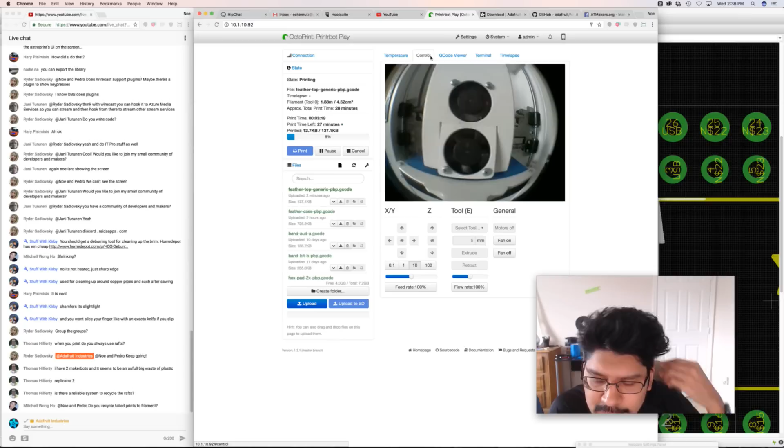Okay, so I need to clean up this purge real quick, because otherwise it'll get stuck to the part. I bet that looks a little counterintuitive, to make sure your purge doesn't get attached to the part, but there are some tricks you can do in the Start G-code where you can get the printer to wipe its nozzle. I don't have that set up here - I just have it set up so the extruder goes all the way up, like 20 millimeters or so, and then it extrudes out 20 millimeters or less. That way the nozzle is nice and primed. But if you're doing a brim, maybe you don't need that - I just haven't updated it.

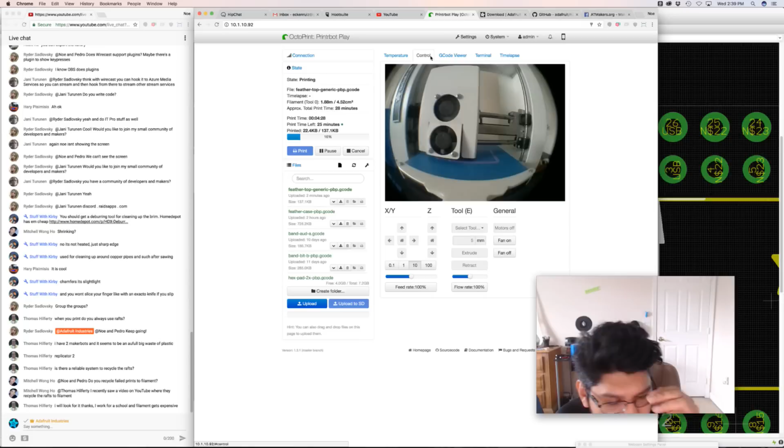Mitchell's asking if we recycle failed prints into filament - he saw a video where they recycled the rafts into filament. Yeah, we experimented with the Filabot extruder, which is kind of a DIY filament extruder machine. I think having a consistent diameter was an issue, along with having contaminants in your material. So if you're doing that on a personal level, I think it's a little bit harder to get a proper system going, because there are a lot of processes involved to get really good filament. The rule of thumb I've heard is that you need 30% recycled material and 70% virgin material. So I'm not too sure. There is a company that does sell recycled filament, or filament made from recycled stuff - I believe it's called... oh boy, I forgot the name. If anybody knows what I'm talking about, let Mitchell know in the chat room. I think it's like... I want to say it's called recycled filament, but that would be too obvious, right?

Alright, so the print looks okay, and I'll get that last button in there.

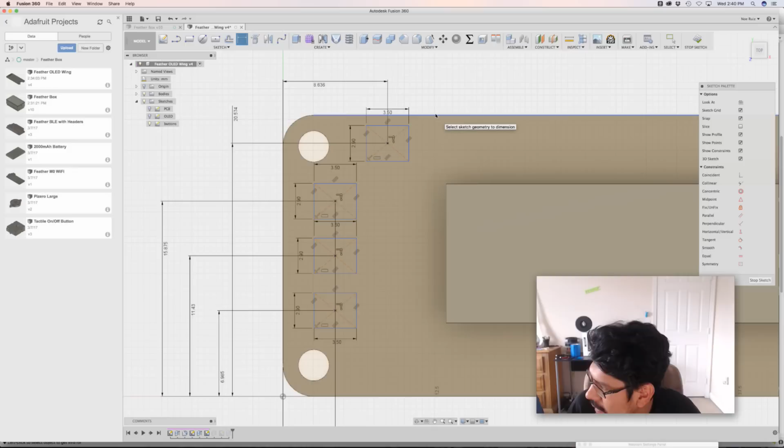Do you remember that company that manufactures filament from recycled material? They did a Kickstarter or something, and they used one of our designs as a reward, I want to say. I just don't remember the name. They're on Twitter as well.

What's that? I saw Adafruit went live. What? Uh-oh, I need to end the stream? Maybe, oh crap, that's going to conflict. Are you sure? I would probably do it since it's International Women's Day.